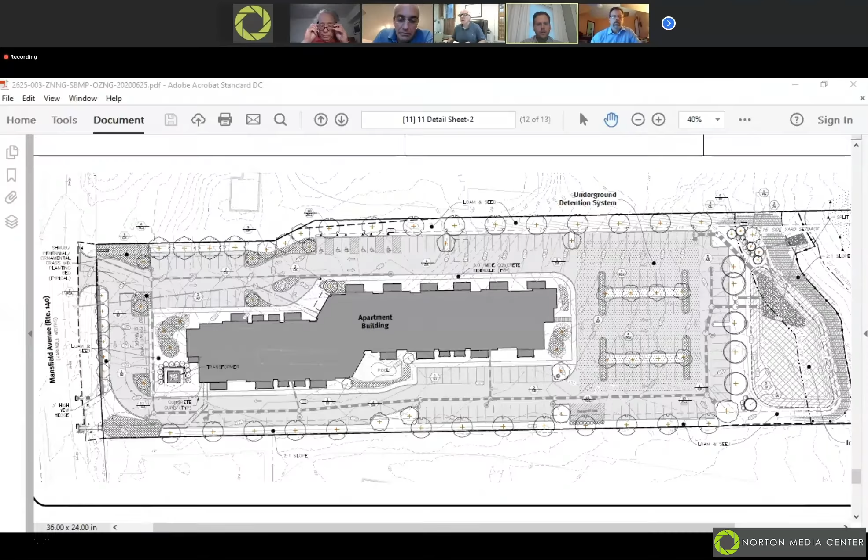Yep, thank you. We just got the peer review today too, and I haven't had a chance to dig into it much, I've been on vacation, but I read it right before the meeting a couple times. In general, I don't see any major obstacles we can't work with the peer reviewer and address, nothing really jumped out at me as a problem. So we'll be addressing those and coordinating with the peer reviewer as we go through that.

So I know at last meeting we talked about the amount of parking on the site. Just for reference, the requirement was around 190 or 191 spaces. We were proposing 179, which was below the requirement, so we were actually asking for a waiver on parking.

In discussion with this board, and concurrently going through the Conservation Commission process as well, I think the applicant's comfortable with reducing the parking, so we're going to remove about 20 spaces. It'll be from this back parking area, and we'll basically be able to chop them out from here.

So you can see there's about 6 rows, maybe 3 or 4 rows would be removed, which would bring this edge in 30 to 40 feet, basically keep the pond where it is, and reduce the impervious surface. Then we were eyeing the area this would create, this flat area back here, for more open space recreation for the residents.

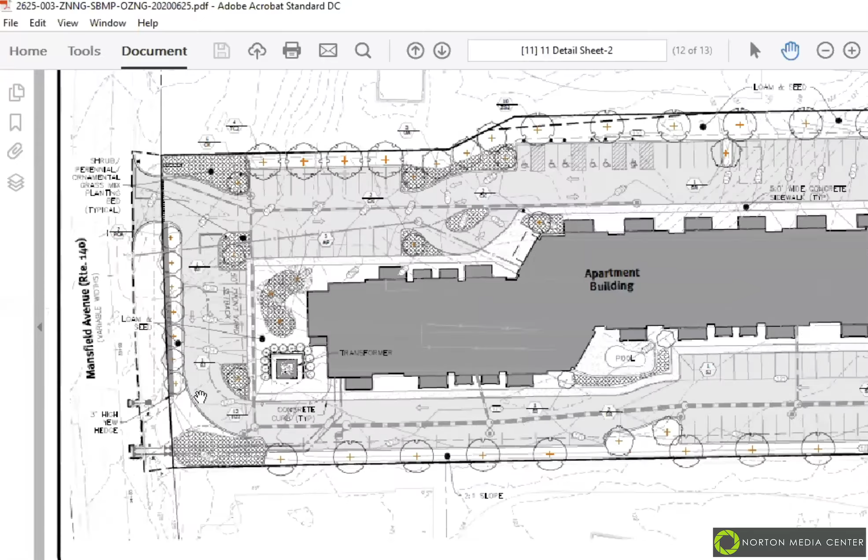The main issue with a sidewalk in the right of way here is there are several utility poles and trees, especially right where our property ends on the southern end. There's a utility pole, actually 2 utility poles, that are about 3 or 4 feet off the curb line, and naturally your sidewalk would want to be along the curb. Then there's a few trees, and I should have brought up the street view. But basically on the sidewalk, we're going to study it further and see what makes sense for the best way to approach that.

We don't have a full response to that question yet. There was some discussion about connecting internally to the back of the shopping center here, and we don't want to pursue that option just because the likelihood of the shopping center continuing that sidewalk into their development would be probably minimal, just because of the cost. So we didn't want to propose a sidewalk that kind of dumped people into the back here.

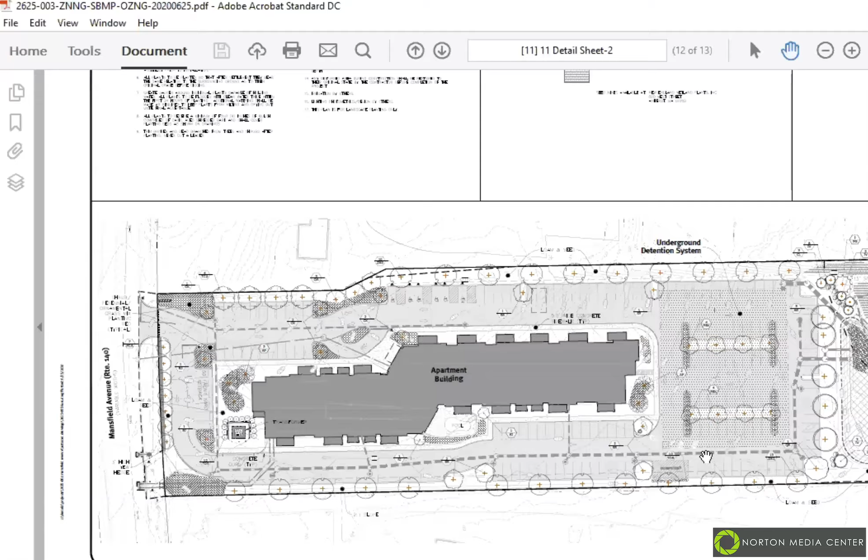Can I ask something? Sure. And other members too, Judy, of course speak up if you have questions. But just a question: when we say shopping center, does that include McDonald's? Yes, it's the Roche Bros., the McDonald's, it's that whole plaza there.

Okay, so I'm not sure how to phrase this. Is the McDonald's land owned by the shopping center owner, or does McDonald's own its own land? It's all one owner, the entire shopping center owner. McDonald's must lease it. It's Gator Properties, they own all of that, including the McDonald's. That's what I was wondering. Who makes that decision? I would think McDonald's might like a sidewalk there, but go ahead. I understand.

The next question we responded to was about why the building had this angular shift or kink in the middle. I'll probably let Jeff handle that when he speaks about his issues, but I'll do my best.

Basically, we wanted to break up this building so it didn't appear as one long building. You'll see that the architect's buildings have a lot of relief on the sides, balconies and things that undulate in and out, and it helps break down that mass.

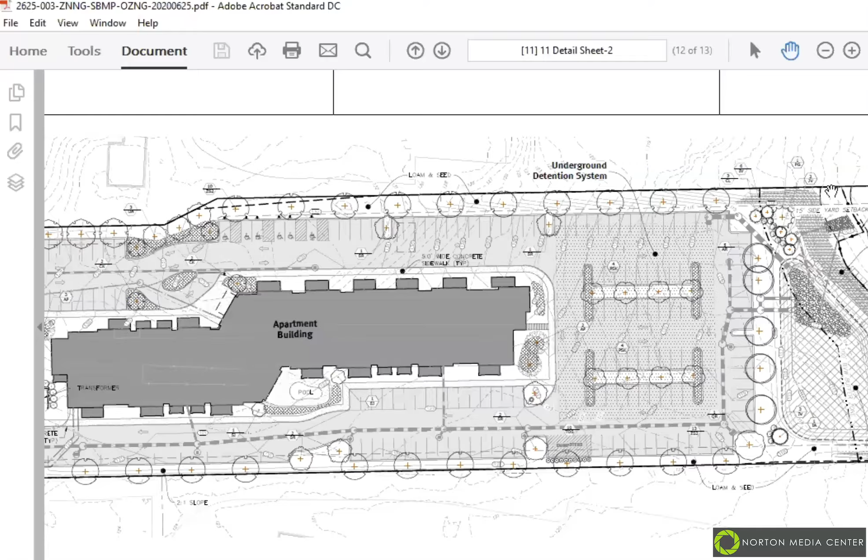So what we're going to propose is a solid fence along the northern property line to either the 100-foot or the 50-foot buffer. We have to work that out with conservation, because they won't allow a solid fence to go right down to the wetland edge since it impedes species and other things. From that point, along the back of our pond, we'd propose a split rail fence, possibly at the top of the pond. The final placement is still being discussed, but most likely it would be solid fence along the northern property line to the front of the pond, and split rail along the back.

That would keep our residents on the building side of the pond, keeping them out of our pond and also out of the woods and the reservoir. We can do more with signage and agreements in their lease documents stating there's no access to the reservoir, addressing that from a management standpoint too. But we are proposing a solid fence along the northern property line and a split rail fence, which would still allow views to the reservoir but hopefully limit access.

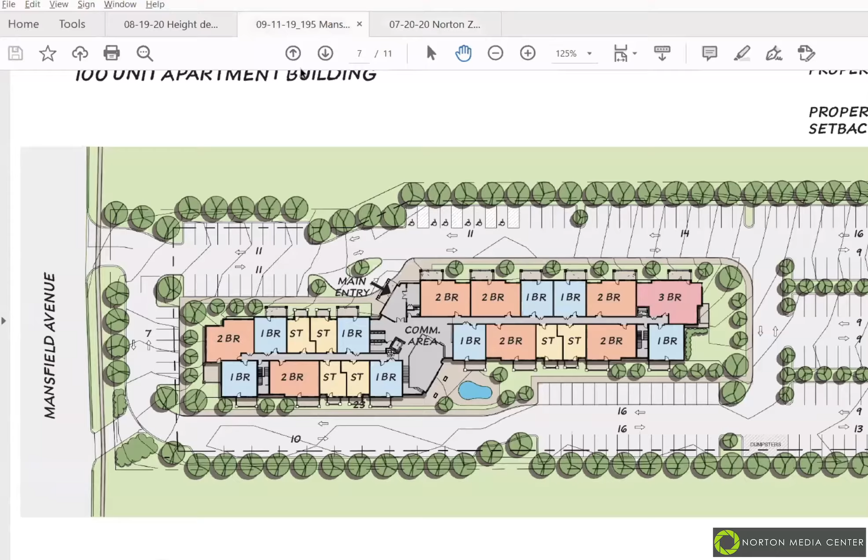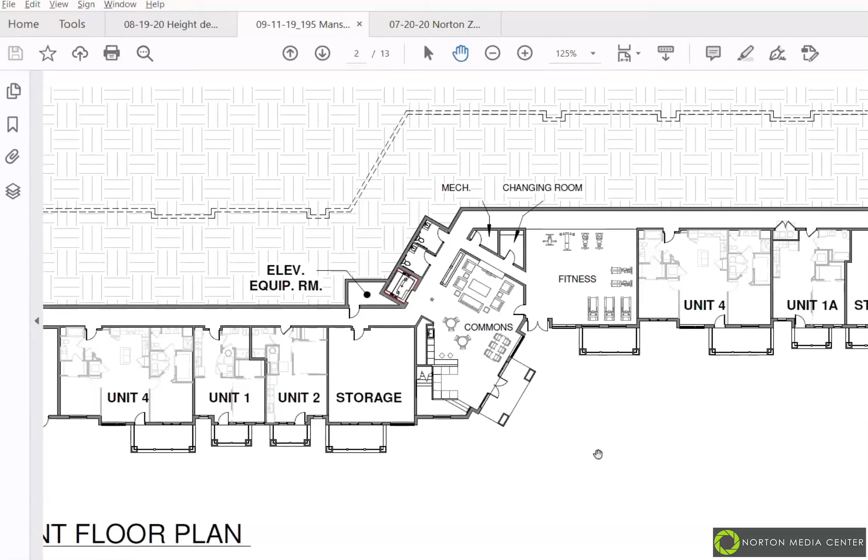When we looked at those buildings, we created a nice opportunity where you can come in—we have a waiting area, general office, leasing area as you enter, a mail area to pick up things, and then a two-story, very nice community space in the center of the building that opens up into the pool. So we have a commons on the ground floor meant to be a shared space, and then the pool off to the right. That was following up on what Brandon was saying earlier about why we had that crook.

The second thing—my definite architectural takeaway from the last meeting—was trying to understand why we were requesting a waiver on the height. This is a very challenging site, and this graphic, hopefully not too complicated, tries to explain why this site is so challenging to develop architecturally. It really has a lot to do with the long, skinny nature of it.

What we have here is the general site. The red line is the traditionally developable area, based on the setbacks on the left, top, and bottom of the page, and on the right, the setback from the wetland buffer zone. There's also grading we've talked about, plus other wetland concerns, which really restrict us on the right side. We also need to get circulation around the building.

When we're doing these buildings, you don't want to put a parking lot off to one side, because that means some of your residents have to end up walking the length of the parking lot and then the length of the building in order to get to their home. So we try to distribute some of that parking.

We also have circulation. We want to make sure that we're getting vehicles traveling all the way around. We also have the fire department access. It's a big thing there.

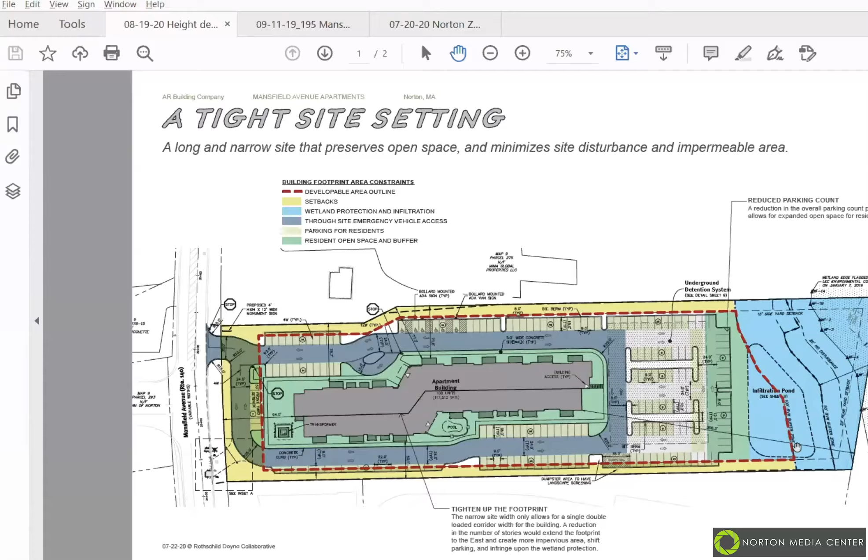Right now, the zoning code defines the limit of the building height at 45 feet. We're proposing, by definition of building height, ours is 62 feet 8 inches. However, the zoning code is also measured to the highest point of the building from the average ground level. That's - I won't say it's atypical because you do see it in some municipalities - but the more traditional approach is...

the highest point of the building when you have a flat roof. When you have a gable roof, it's typically to the midpoint. And then a mansard roof also has a deck line. What that really does is it recognizes that those roof forms have very different appearances from the street. So if there was a limit of 45 feet, a flat roof at 45 feet would appear much taller than a gabled roof would at 45 feet.

Not that this has real precedent, but I just kind of looked around some of the neighboring towns - Attleboro, Mansfield, Taunton, and Easton - all have this modified definition, which actually takes into consideration the gable itself. So if we were to go with just a straight flat roof on this, we feel we could actually get a 47'6" roof. Right now it's 3-story, 45 feet. We feel like we could, if we forced it, get 4-story, 47'6".

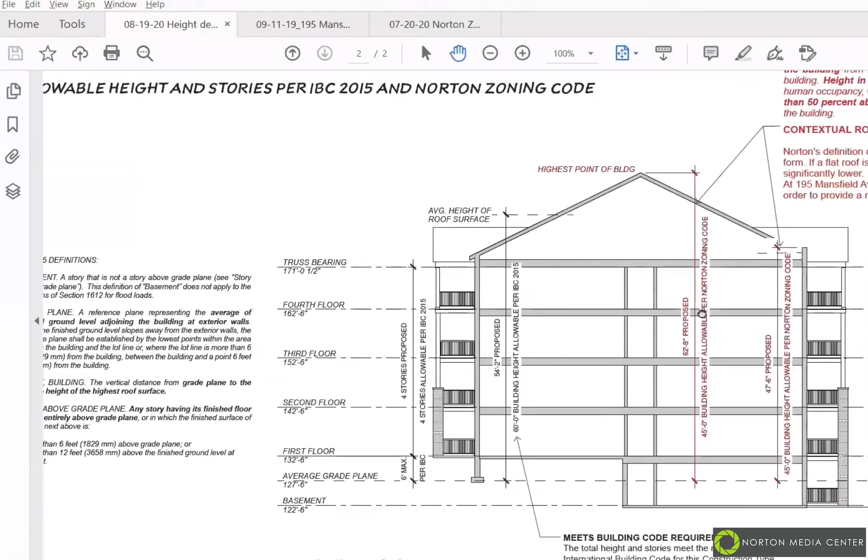The 45 feet is where the limit would be at this black dashed line. The red line is - we think just using typical constructions - AR as an amenity likes to get a little bit of extra height, so not just a flat 8-foot ceiling. We try to hit 8'6" sometimes if we can, and people respond very well to that. And then we have this gable here, which is really what's driving that. But as you can imagine, if you're looking at this directly from the street, you don't necessarily read that full height. So those are - I'm happy to go into more detail.

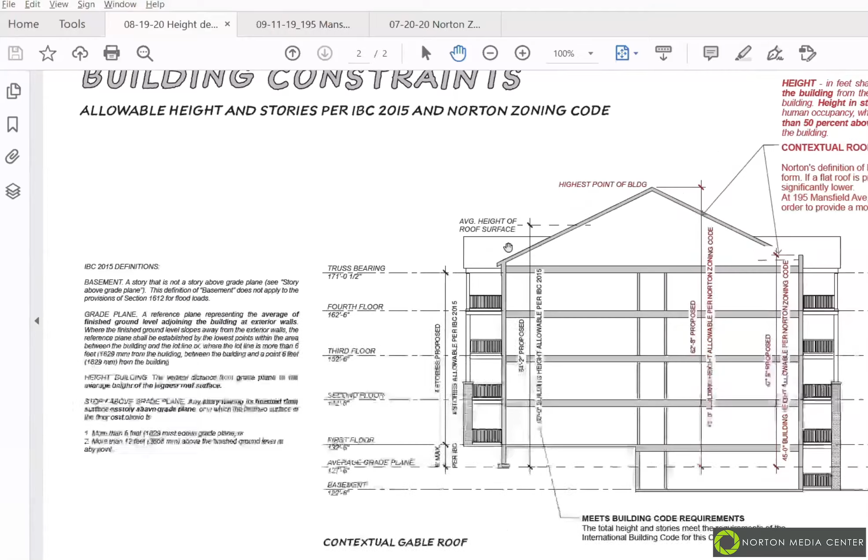Hey, one second, I'm sorry. Jim, yeah, go ahead.

So let me ask you, again, because I'm just seeing this for the first time - but if you dropped it down one level, it almost looks like you would stay, even with that roof line the way you want it, you'd be under - and it's tough to tell. Again, I'm just looking at this for the first time. If you dropped it down a level, you would be under your 45 feet.

So you're saying if we eliminated a floor? Yeah, if you eliminated the top level. So if we eliminated a floor, our typical floor to floor is 10 feet. So if we eliminated it, we would be at 52'8" instead of 62'8". All right, so you'd still be over. Okay.

That would reduce what number of units? Roughly 22, I think. It's not the same every floor, right? No, there's some subtle differences. We have sort of a half story on the bottom floor, but I want to say it's around 22, 23.

Another question for the board and for Paul, what is the apartments next to Red Mill Village? Wasn't there a height issue there as well, an exception? I don't mean to put anybody on the spot. I'm not remembering either.

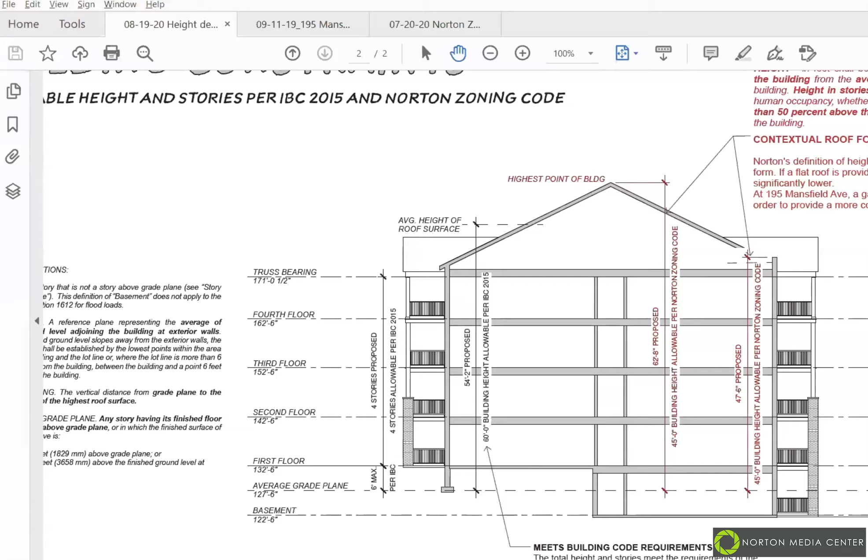That kind of gives our justification on why we had gone to the height. So I can wrap it there, and maybe give it back to Peter, or if Jason had any comments.

Unless there's any more questions from the board at this point, then I think our next brief presentation would be Jason, and then Scott on the expanded study on the traffic. Thank you, Peter.

Mr. Chairman, members of the board, good evening. Scott Thornton with Vanasse and Associates. We prepared the initial traffic assessment for the project, and as Attorney Freeman mentioned, I went through an overview of the traffic study at the last meeting. At that point, there was a request from the board to add an intersection further to the south of the project, the intersection of Route 123 and Route 140.

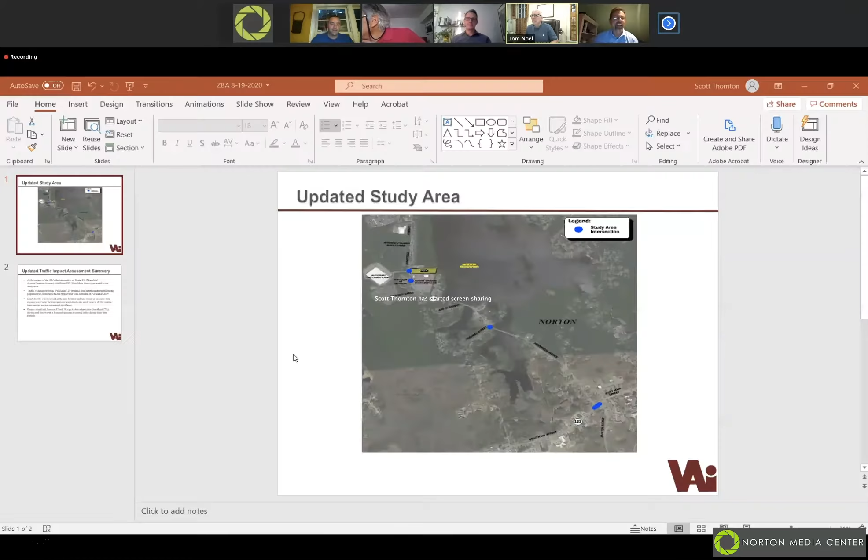I'm going to try to share my screen. Forgive us for not printing out the whole 188 pages, at least I didn't. Save a tree, I read some of it. I couldn't get through the whole thing. Reading and printing it are two different things. It's good nighttime reading. Put you right out.

I won't be long, I just want to give you an idea of what we found with the addition of the intersection of 123 and 140. As you can see on this study area map, the intersection is located about 1.5 miles to the south. It's the intersection of West Main Street and Taunton Avenue with Mansfield Avenue, sort of an offset four-way intersection.

Paul DiGiuseppe had provided some information related to the Cumberland Farms traffic study, or supplemental traffic study, that had done traffic counts and analyzed that intersection. Their counts were from November of last year, so we were able to take that data, modify it, bring it up to 2020 conditions, and use that to further distribute our traffic further down 140 into the intersection, identifying the impacts.

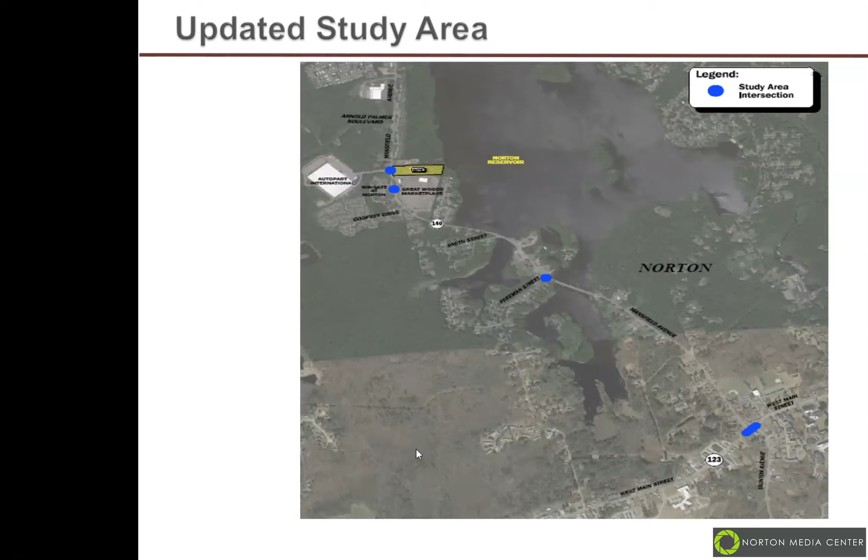I gave you a brief overview of the intersections that were in the initial study area. For this intersection, the peak hours out there are in the morning between 7:15 and 8:15, and in the evening between 4 p.m. and 5 p.m. Whereas further to the north on 140, the peak hours are in the 7 to 8 range, and either 4 to 5 or 5 to 6. The volumes are pretty consistent between 4 p.m. and 6 p.m.

In terms of the analysis, we added the intersection of 140 and 123, collected that volume data from the Cumberland Farms project, and looked at the crash history at that intersection. It was also, like the other locations, found to be below the state average crash rates for intersections. Therefore, the crash rates at all the intersections in the study area would not be considered significant.

In terms of project traffic increase at this location, we're looking at adding between 13 and 18 trips to the intersection, total entering and exiting, about evenly split. That's about 6 trips headed southbound in the morning and about 7 trips headed northbound, with similar splits in the evening time period. But in terms of an overall traffic increase, it's a 0.6% increase in the morning peak hour and a 0.7% increase during the evening peak hour.

When we put that into the analysis, the project traffic increase results in about a 1 second increase to the overall delay at the intersection during those time periods. So, as you mentioned Mr. Chairman, we sent you a nice 180-page report right off the printer. We'll look forward to getting peer review comments on that traffic study and working with your peer review consultant for traffic. That's all I have, if you have any questions I'll be happy to answer them.

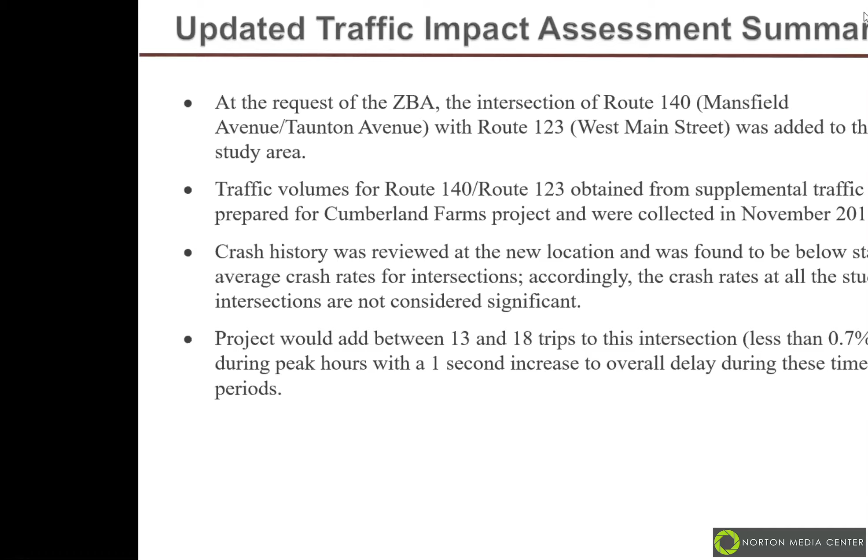Hey everybody, hi, good evening. Yeah, not much to add here, I think everybody's kind of hit all the parts. Again, I'm Jason Campbell, Senior Vice President, Acquisitions and Development for AR Building. We're just moving through the process. I think this process took a little long because of what's been going on, not only with the virus, but the process itself has been a great one. The town's been great to work with, and I appreciate you guys making the time to do this. I think this process has been fair and helpful, and we're here to help answer any questions. I'm just here to say thanks, and anything else you want to know, I'm happy to help.

Board members, questions? I don't think I have anything. David? I don't think I have any.

Okay, Mr. Campbell, back to the sidewalk, sorry. Do we know, was the shopping center owner approached about this or spoken to about this? Yeah, we can talk to them, we can do that. For us, I'll tell you, we'll happily talk with them, we'll go through that process. I don't want us to be beholden to it if somebody else doesn't want us to put a sidewalk coming into their property, I'll be open about that. We've had that in the past, and it's kind of like if you build a sidewalk up to your neighbor's property, then what happens? But we haven't approached them yet. We'll talk with them, that's not a problem, we can do that and let you know.